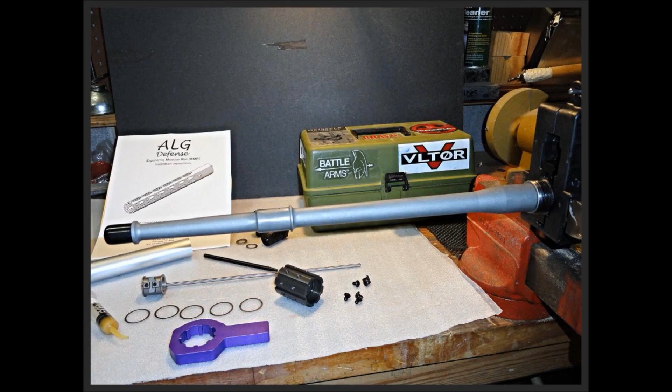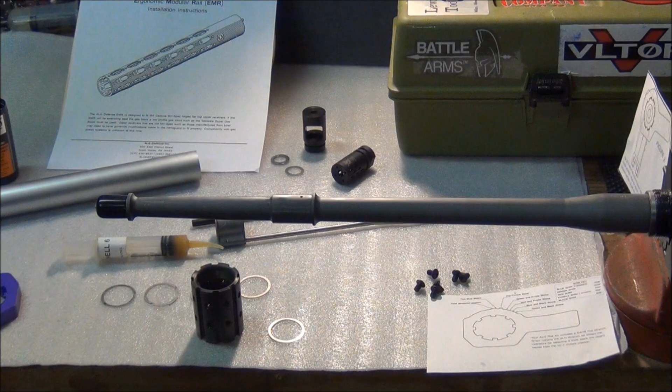The first step is to put the upper receiver and barrel into vise blocks, and then put that into your vise. Once it's secure, you're going to want to take a good anti-seize or grease and put a liberal amount onto the receiver threads, the barrel, shoulder of the barrel, and then the actual individual shims in the kit.

And then once you have that done, you're ready to put your first shim on it, which is the black one. It goes on the barrel first, and then you're going to want to put the barrel nut on. And you're going to screw it down to hand tight pressure as hard as you can 3 different times, and we're doing that so we can get the shim seated so it gives us a good measurement for the alignment later on.

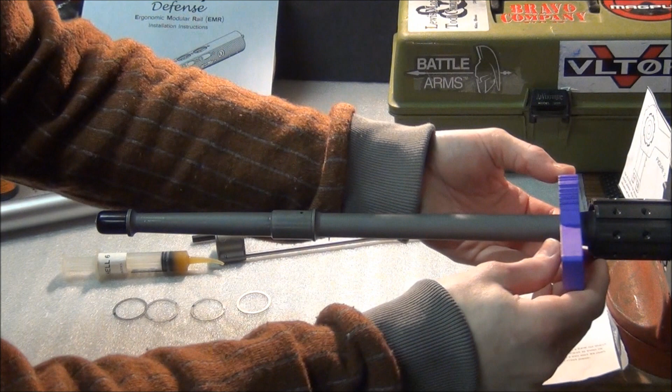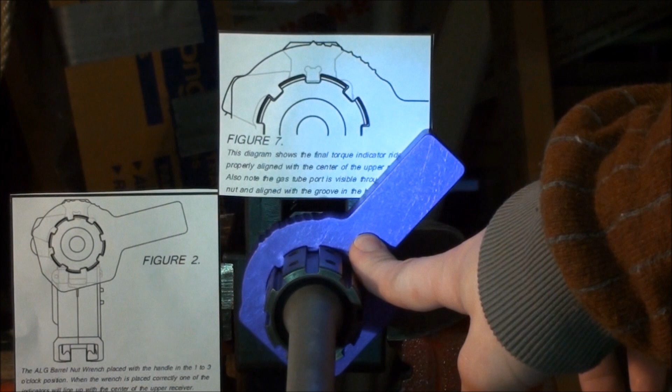So once you have that done, you're going to want to take the ALG provided wrench, and align it on the barrel so that it lines up between 1 and 3 o'clock, like so. Once you have that, we now can take a reading to see if we're in proper alignment range or not. As you can see, the proper alignment range is over here in figure 2, and we're here, so obviously we're not. Now we need to take this back off and go through the process of using additional shims to get the proper alignment pre-torque.

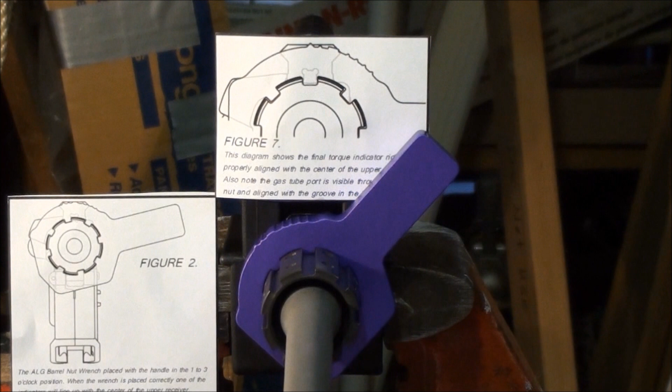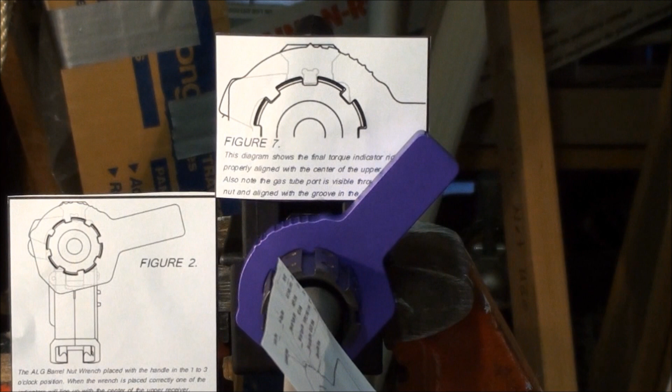First, you need to take the chart that comes with the directions, as you'll see here, and according to where you are actually lining up when you're not properly aligned, you then correspond that to the position on the chart, and it calls for us to use both the green and black shim. So we can leave the black shim on, but we'll have to be adding the green one this time. So let's do that.

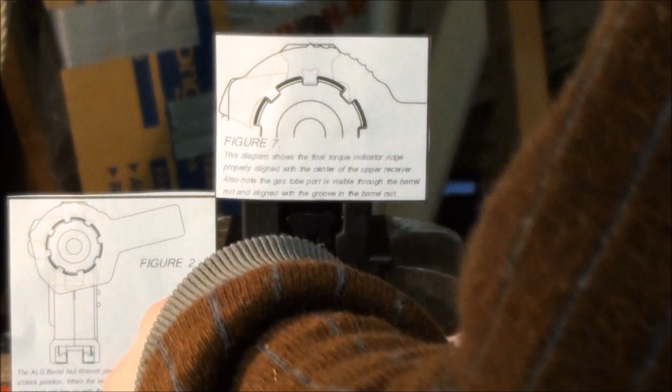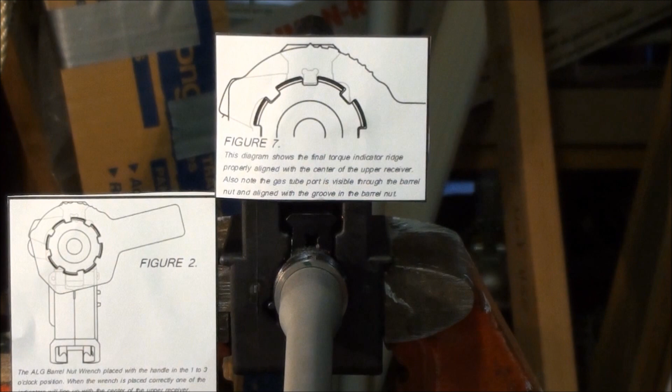So again, we can leave the black shim on there, and we just need to add the green one to bring us into the proper amount that it calls for on the chart there. And once we do that, you're going to want to bring it hand tight again as hard as you can a couple of times, just to make sure that the shims are properly seated under there.

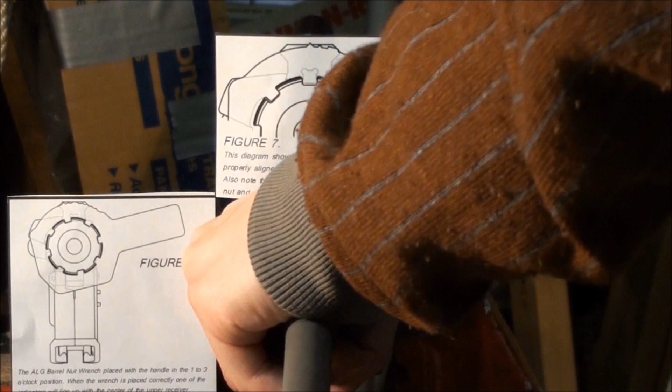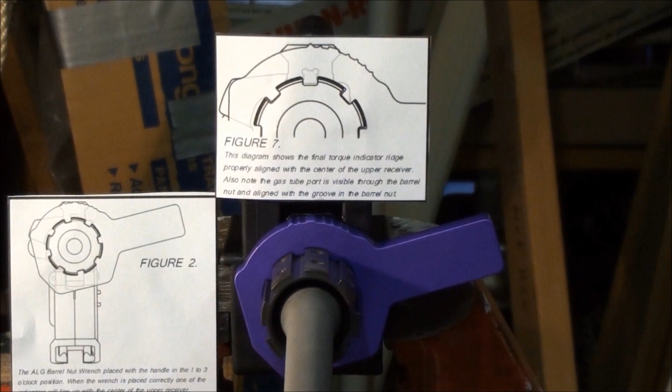And once that's done, we now can take another reading with the trick wrench to see if we are in proper alignment according to the chart there. So now, as you'll see, we're perfectly corresponding to figure 2 over here, which shows what it should look like pre-torque for the proper alignment.

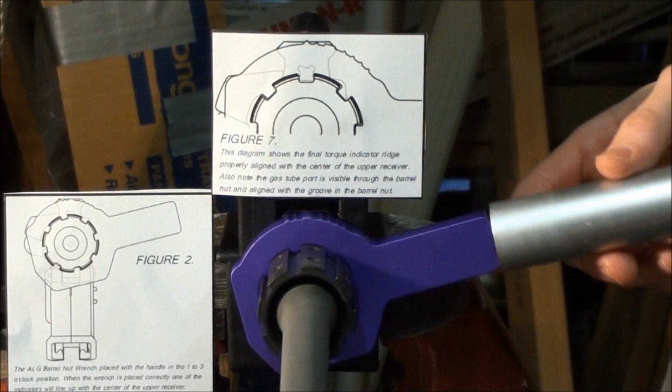Okay guys, so now that we've used the proper shims to bring us into the correct pre-torque alignment, and we're ready to do the final torque on the barrel nut, it calls to just use a 3/4 inch pipe. I just found something laying around so that you can slide it onto the trick wrench like that to get enough leverage. And once you have that, you just start to torque it down to where we then get the perfect alignment according to the chart up top here.

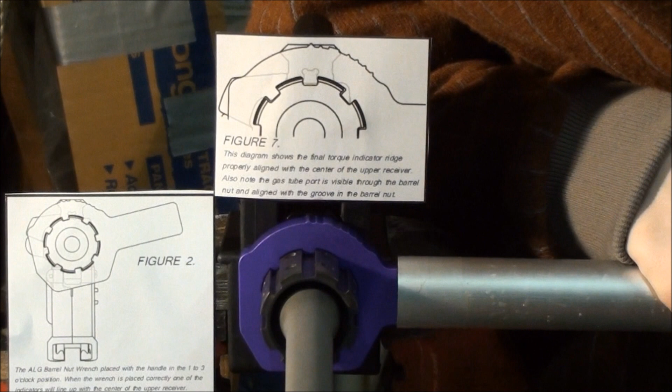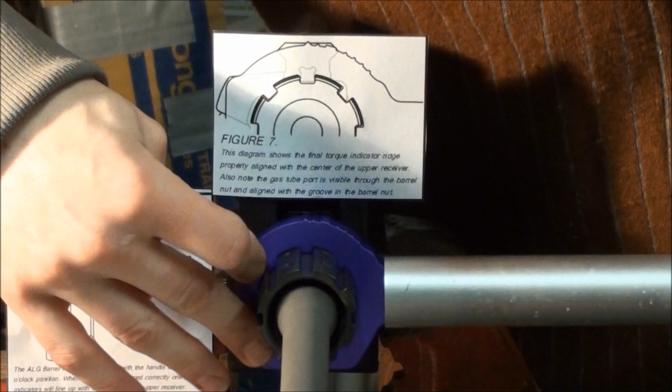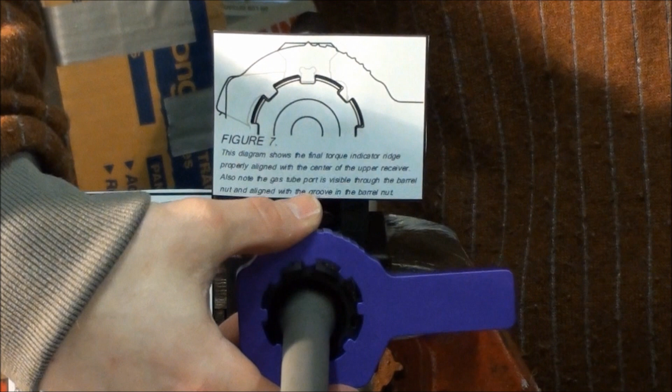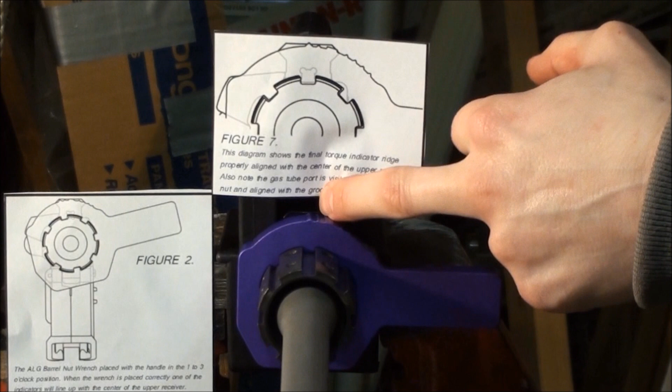I'm going to bring it just a little more. And I think that has us at proper torque now. And as you can see, according to the measurement, just slid off, that I shouldn't have done. And now as you can see, we have the last serration up here perfectly aligned with the top of our upper receiver, which means we're now in proper alignment for the gas tube and gas block assembly portion of the video. Okay, so moving along.

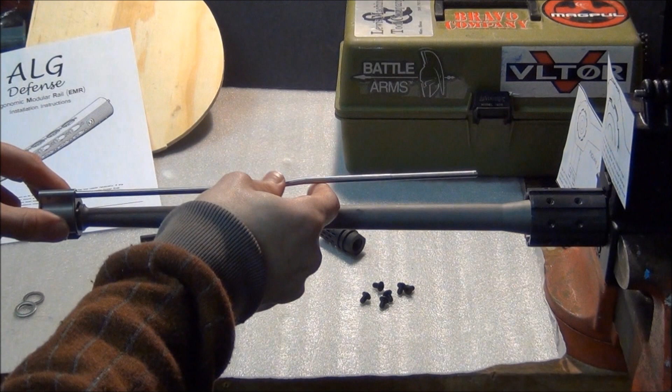Okay, so now that we've brought the barrel nut into proper alignment using the provided shim kit and put the final torque amount on it, we actually are going to be installing the gas tube and gas block onto the barrel and be tightening it down, and then moving along to using whichever muzzle device you happen to be going with.

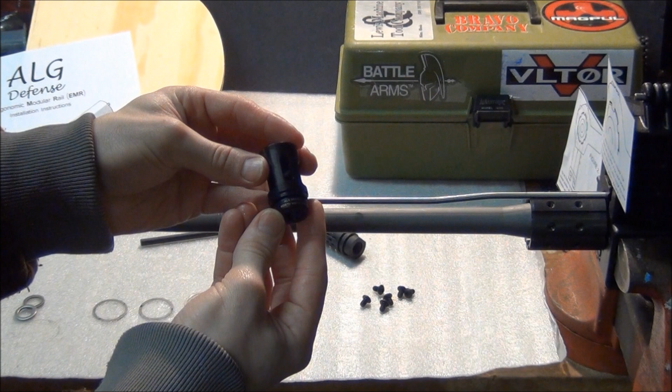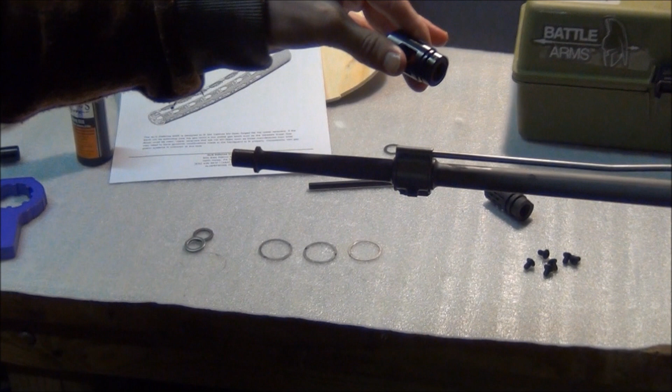We're using the new ALG Defense single chambered brake, which is priced really competitively, especially considering it's a really quality piece. So anyway, that's what we're going to be showing up close now, just for the purposes of this video, since it's ALG Defense's new products for 2014.

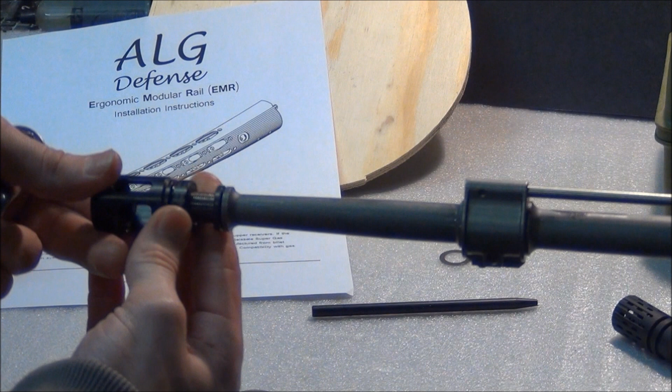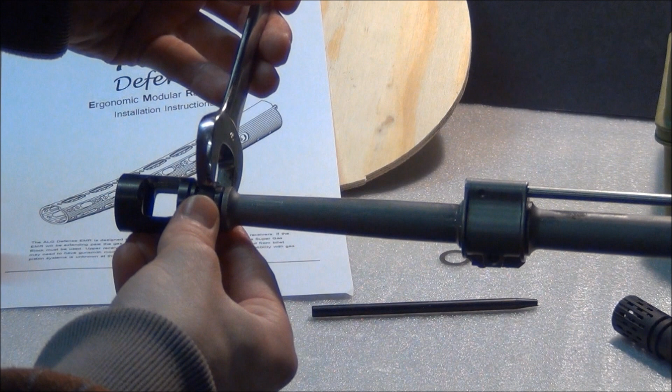It comes with these 2 shims or washers, but I'm going to opt to use a crush washer. Just make sure you put a liberal amount of grease onto the crush washer first, which we've already done. And then put the muzzle device onto the threads. And once that's hand tight, it's now time to take the appropriate sized wrench and bring it into correct timing.

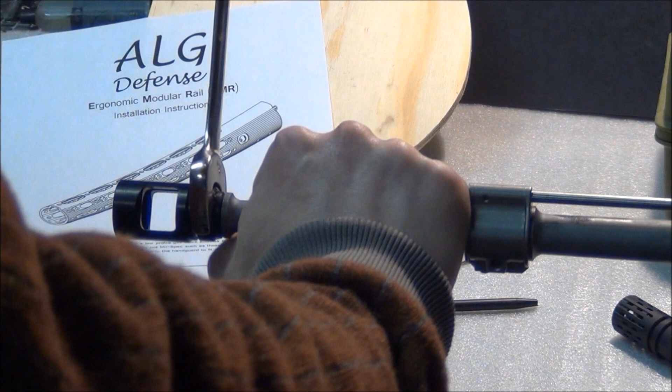I basically just do it a couple of quarter turns and then back off just to make sure you get it properly on there. And now we're going to tighten it and time it down finally for good. And that should have it.

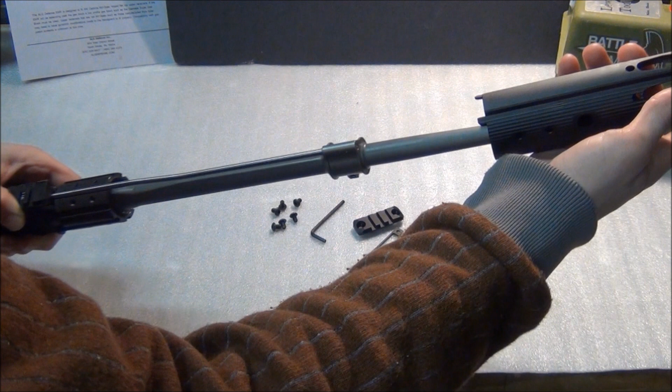Okay guys, now that we have completed the assembly in terms of torquing the barrel nut and getting the gas block and tube assembled, and then putting the muzzle device on, now we're ready to put the rail actually on the barrel nut, and we'll illustrate that now by sliding the rail over the barrel to where it meets the actual barrel nut.

And you're never going to want to force this. I put just a couple of drops of oil right here on these contact surfaces to help it. But as you can see, this is just such a sweet tolerance, especially for a $135 rail. But look at that. So anyway, as you can see, it's a perfectly flush fit. And you just slide it all the way back until these anti-rotation tabs come back over the upper receiver.

And you're going to want to line the 6 holes up in the rail to the corresponding holes in the barrel nut, and then with the provided 6 mounting bolts, you're just going to screw those into the 6 holes like so. Save a little bit of time. We're not going to do all 6 on video, but you guys can basically get the hint.

And like that, and you'll just continue the process for the next 4 until you have all 6. And then as you see, that's it. It's on there, rock solid, bomb proof, and good to go. So the next step and the last step will just be showing you guys how these rail accessory panels mount onto the rail itself.

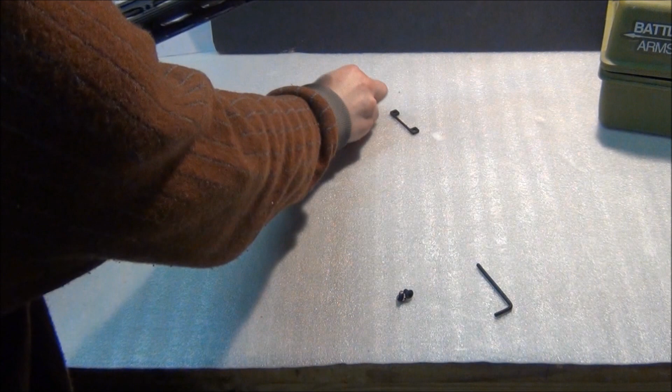Okay guys, finally we're just going to show how the accessory rail panels work. To save time, and because this process is kind of tedious, we won't be showing the actual installation of one of them, but rather just kind of pointing out the principle and how they work.

So anyway, basically it just works by using a slide nut, and the slide nut goes into these channels that are machined into the ID of the rail, and you just take your sliding nut and slide it to the corresponding area on the rail in which you're going to want to mount kit at.

Once the slide nut is in the position that you want it at, you simply place the rail accessory panel over the slide nut and then use the 2 screws to tighten it down. And then once they're tightened, they're not going to go anywhere. Certainly very rugged and, as they say, bomb-proof.

So anyway, guys, I hope you enjoyed the video. This is an excellent rail for the upcoming year, and hopefully some of you guys will be able to check it out. Thanks for watching.